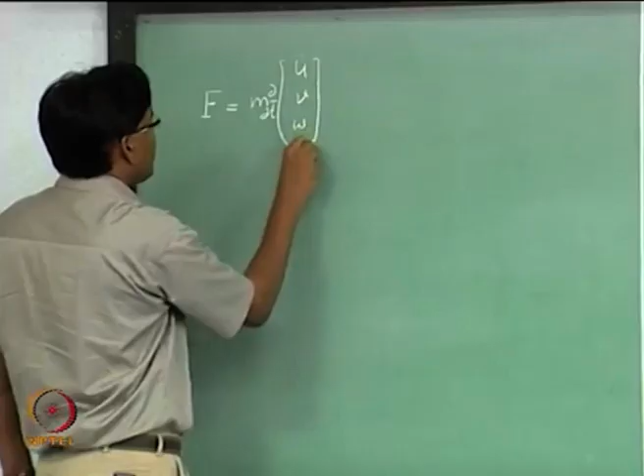Did we take into account all those things? Not really, right. So if you were to include all those things into account, then what you would have is this, plus

the mass of the aircraft changing in time. This is the mass which is internally being consumed, and there will be a mass which will be exiting the aircraft, isn't it. So you also have another component which is m-e-dot, the exit mass rate.

Remember u, v, w are velocity of aircraft along the body fixed axis. So these exit velocities are also along the body fixed axis, and m-e-dot is the rate of change of mass leaving the aircraft. This all has to be added to the Newton's law. It is going to change the momentum of the aircraft, isn't it.

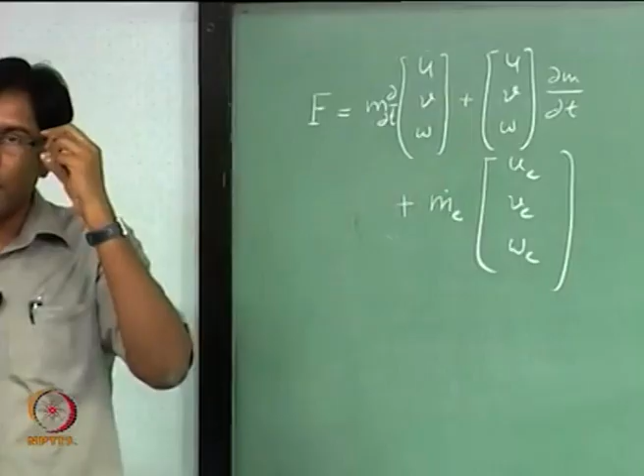But we have not modeled this part in our equations, only for the reason that all of these are actually incorporated in the thrust. Because we already take care of the pseudo forces which are being generated when the mass is exiting the aircraft through the thrust or propulsive forces, that is why we have not modeled this in our Newton's law equations. So our aircraft equations are accurate for a rigid body aircraft.

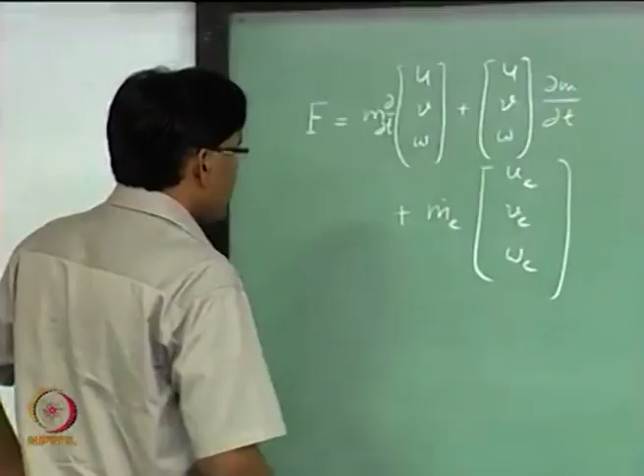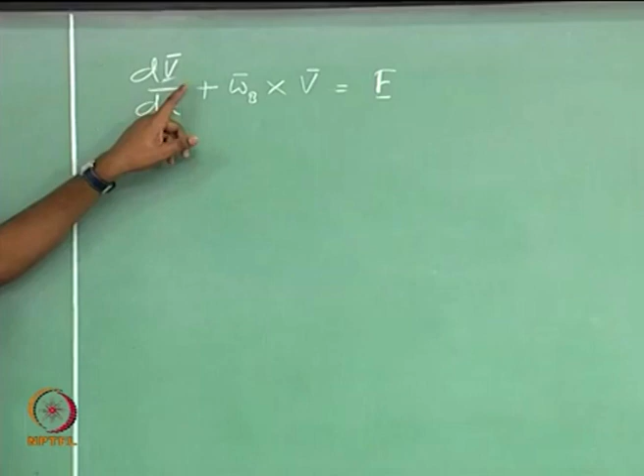This was just one question which might come to your mind, so that is why I was trying to answer this. Now, we wrote the equations in the compact form. Here V is the velocity of the aircraft along the body fixed axis. So I am writing all the equations along the body fixed axis - force and the moment equations.

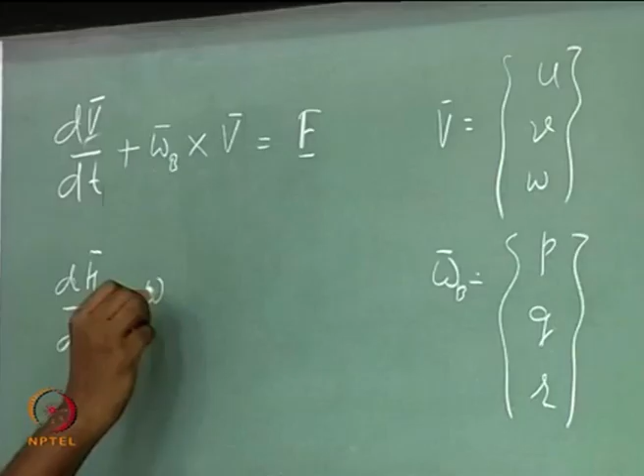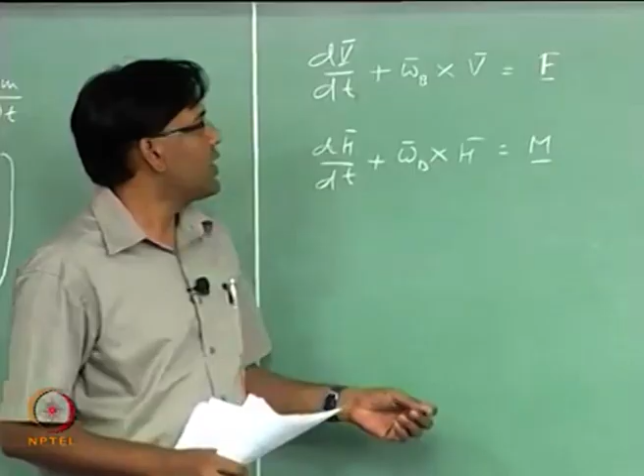What about this force? What is this force? This force is the sum of all external forces, and I have to take the component of this force when I want to separate out the equations along each axis - then I have to take the component of this force along those axes, isn't it? So let us try to write what this force is.

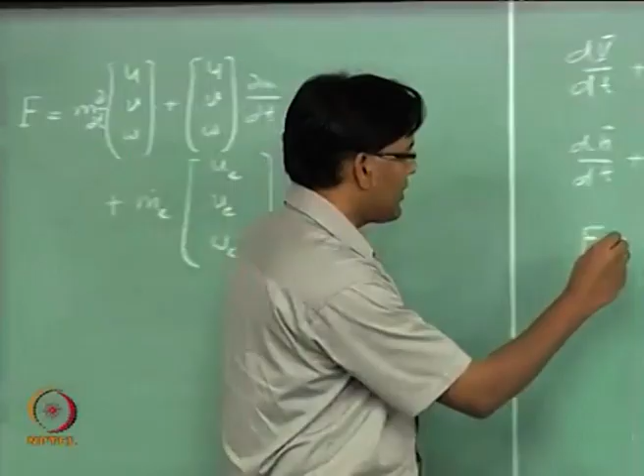So, how many forces are going to act on the aircraft? Forces acting on the aircraft - external forces - are aerodynamic, gravitational forces, and propulsive forces, right.

It will be external, but it will depend upon the variables of the aircraft. And this force will actually include also the forces that come by applying the control surfaces - when you deflect the control surfaces, that force is actually changing the aerodynamic force. So this is the aerodynamic component, gravitational component, and

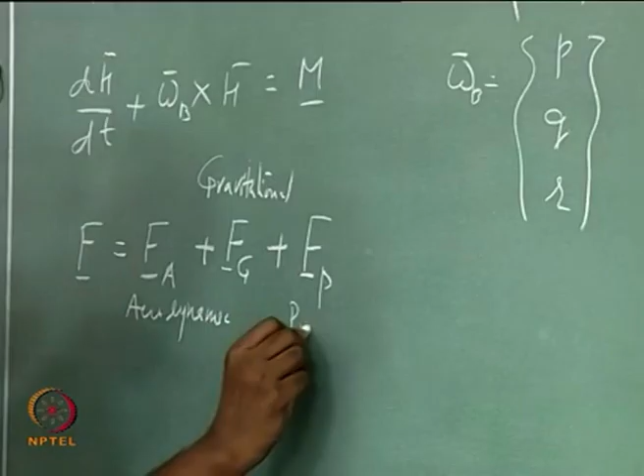propulsive forces. So, similarly, we will also have moments which will consist of these three different components.

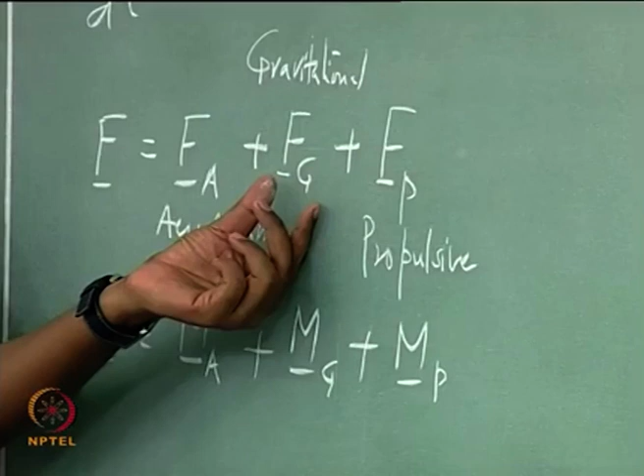Now, you know that each one of these forces is convenient to write in a different axis system. For example, if I look at this gravitational force, I know that force is acting along the Z-E axis of the earth, isn't it. So this F-g is most conveniently written in the earth fixed coordinate system, and this vector is this.

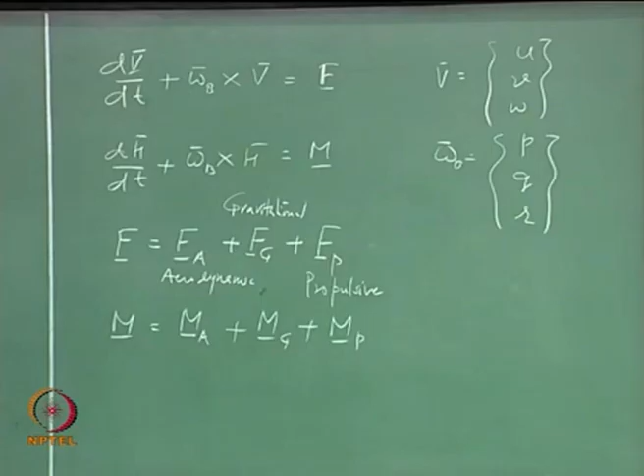F-a is more convenient to write in the wind fixed axis system. You remember we take the component of drag along the velocity, or opposite to the velocity, and lift is perpendicular to that. So this force is more convenient to write in the wind fixed axis system. We will come to this axis system soon.

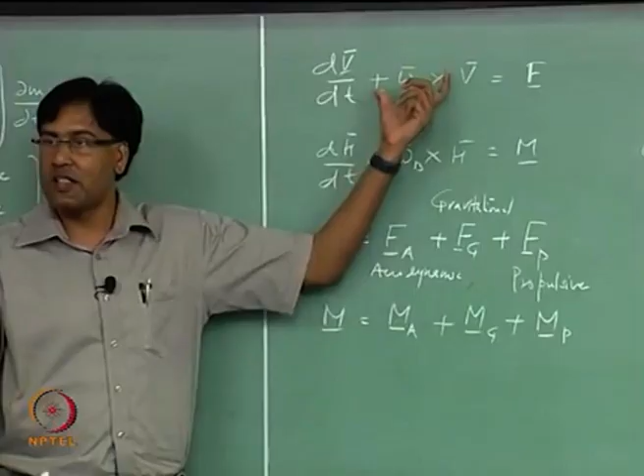Drag, the side force, and the lift - our final aim is to write the component of all these forces along the body fixed axis when I am trying to balance the two sides. It depends which axis system you want to write your equations into. You have to accordingly use the transformation matrices to write these forces and moments along that particular axis system.

Now there are different ways of looking at it. One thing is you are collecting data in the wind tunnel, trying to find out the aerodynamic forces and moments, and that you are doing in a particular axis system. So if I want to keep that data as my reference axis system, then I have to rewrite these equations along that axis system. That's one reason. Second reason is there are some axis systems in which if you write the equations, computation or analysis becomes simpler. You can do all that conveniently if you have a good knowledge of transformation matrices.

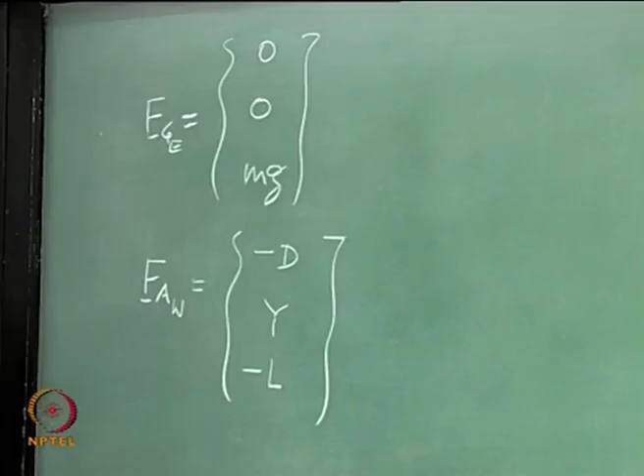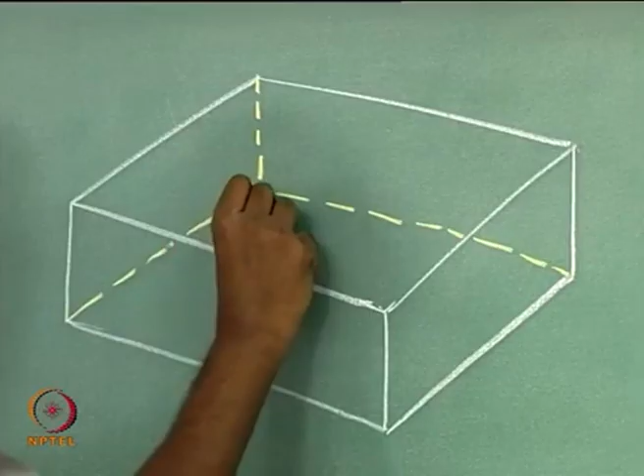I have been talking about transformation matrices in the last couple of classes. Let us try to look at how to resolve this vector along the body fixed axis. So if this is my body fixed x axis, this is body fixed z axis, and body fixed y axis.

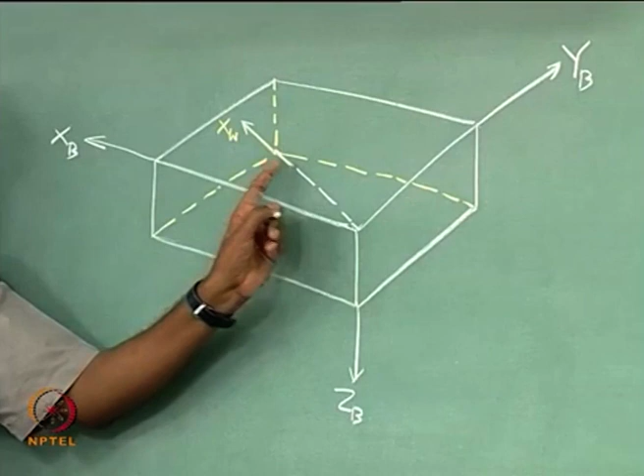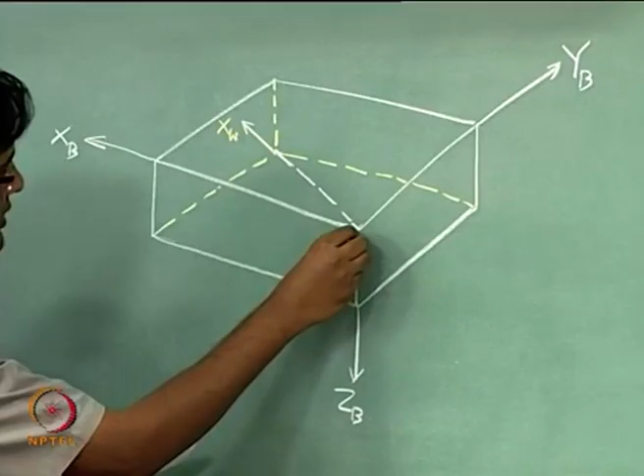The velocity vector is along this line, and that is pointing towards the x axis of the wind fixed axis system. So the resultant velocity vector is pointing towards the x axis of the wind fixed axis system. If you want to know where the other two axes of this wind fixed axis system are, they are not going to be lying on these axes.

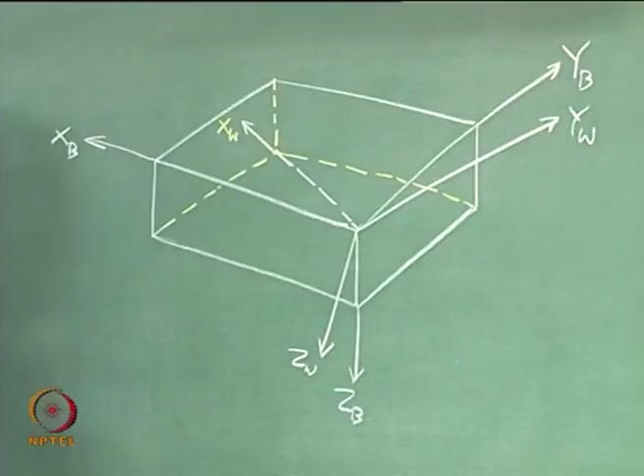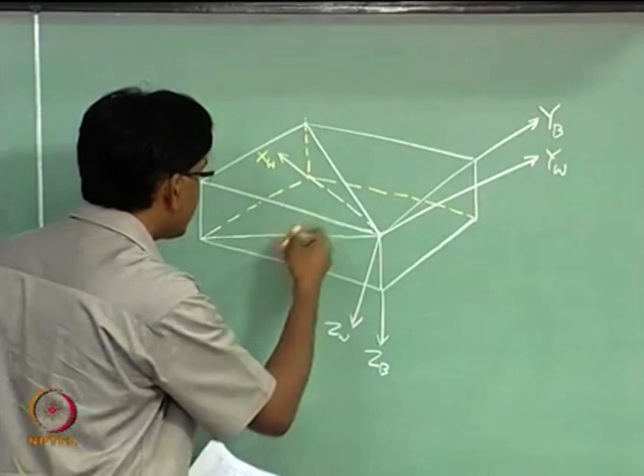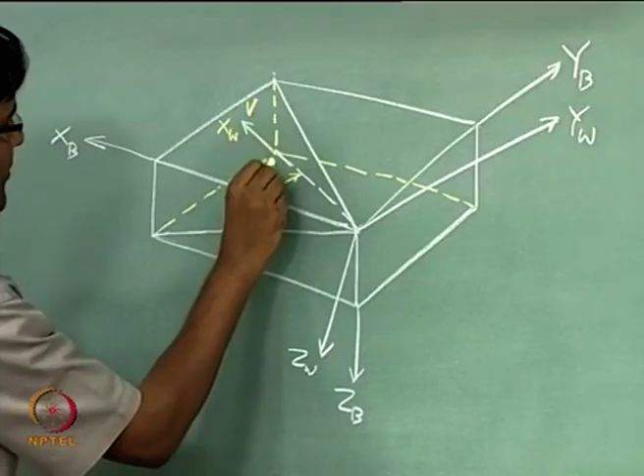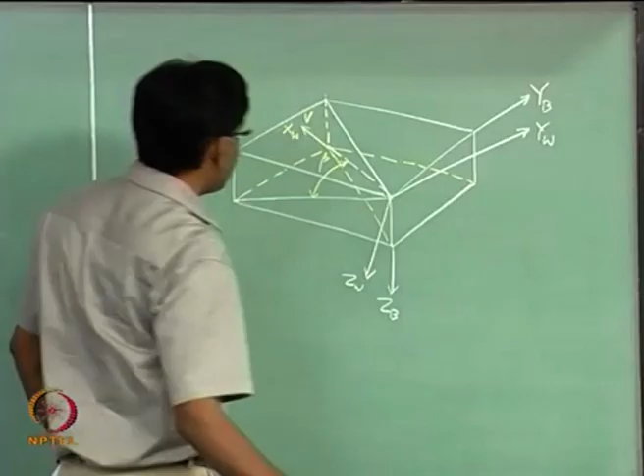So we will take a right handed coordinate system. Let us join this line and also join these two points - then you know that the angle that this vector is making with this face is your side slip angle. Everybody agrees with this? This is how we define the side slip angle to start with. So I should have actually joined these two points also, so that you get this. So beta is this angle - the angle that this velocity vector is making with this plane is the beta angle, side slip angle.

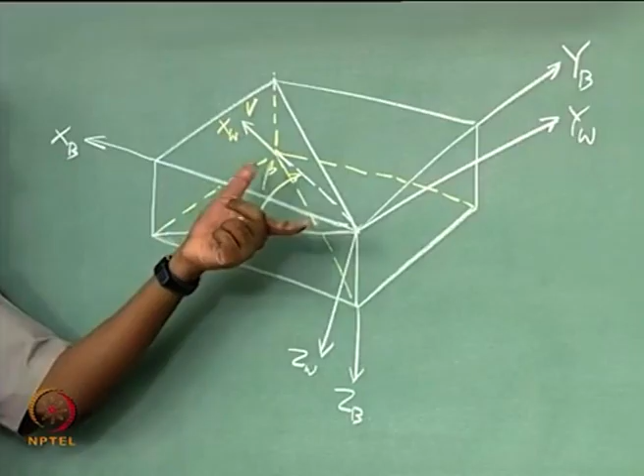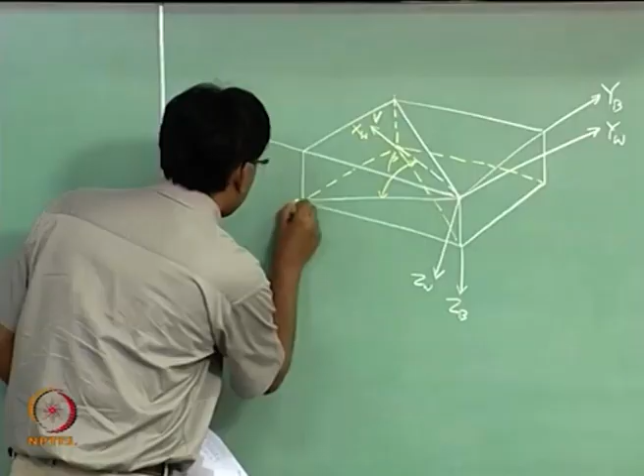Now, if I give a rotation of the wind fixed axis system about ZW by beta, then I can come to this axis system - I can get XW aligned with this line if I rotate that wind fixed axis system about the ZW axis. And what you get then is XS. So this axis system is called the stability axis system.

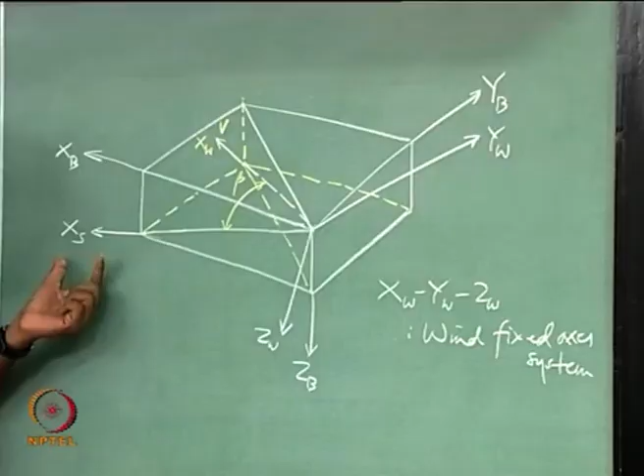Let us write down this clearly. So you have rotated this vector about the ZW axis, in the XW YW plane, giving a rotation by side slip angle beta about ZW axis, and then you reach this. So this involves rotation by beta about ZW - beta or minus beta actually, because my YW will be rotating towards XW, and we call that rotation a negative rotation. So actually it is a rotation by minus beta.

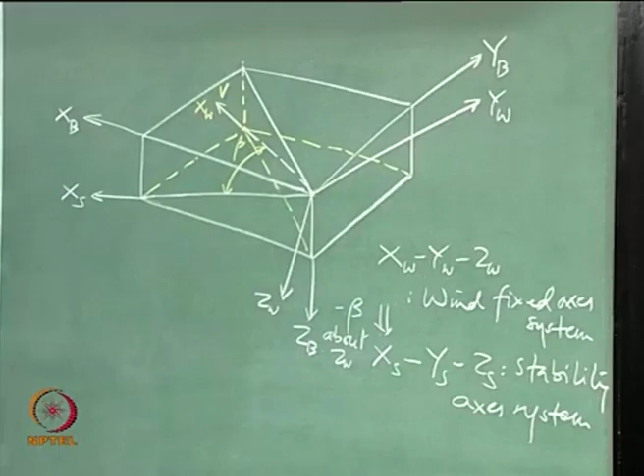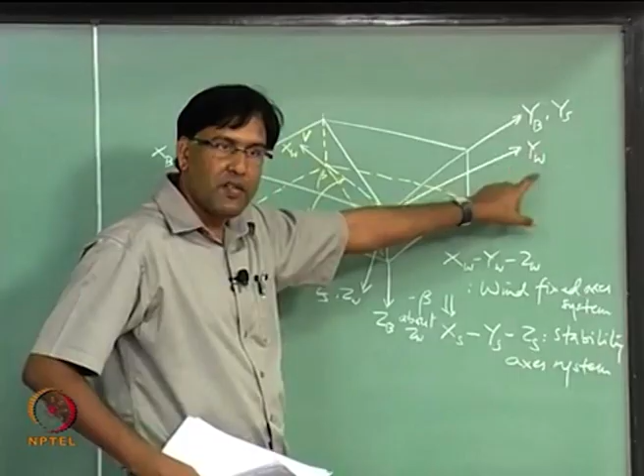So we have reached a new axis system - I have given rotation about the ZW axis. So the Z axis is the same for the stability axis system and the wind fixed axis system, and this y axis of the wind fixed axis system is going to rotate with x. So finally, after this first rotation by minus beta, it is going to coincide with the body fixed y axis.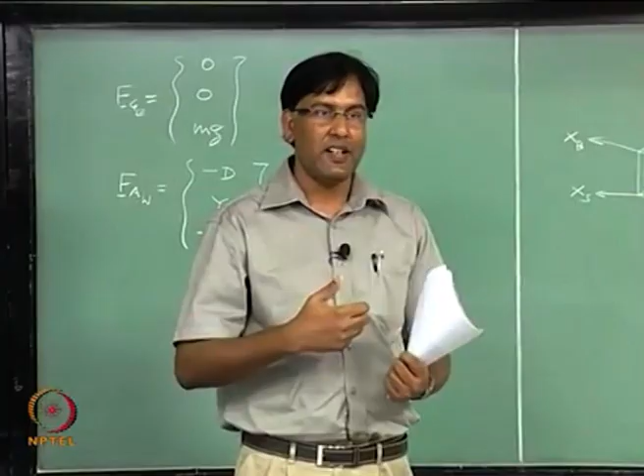What is this angle? I have taken the component of velocity, the projection of velocity on this plane. So now the velocity is in this direction. What is the angle between this axis and this axis? We are talking about the wind, the velocity vector - so what will that angle be? The angle of attack. There are only two angles involved here: the side slip angle and the angle of attack. So this angle is the angle of attack.

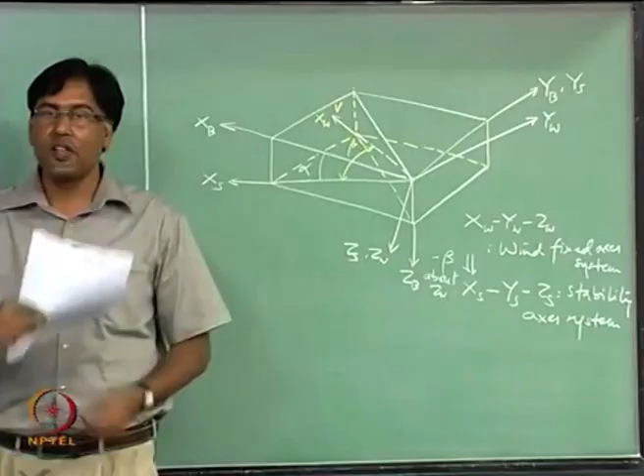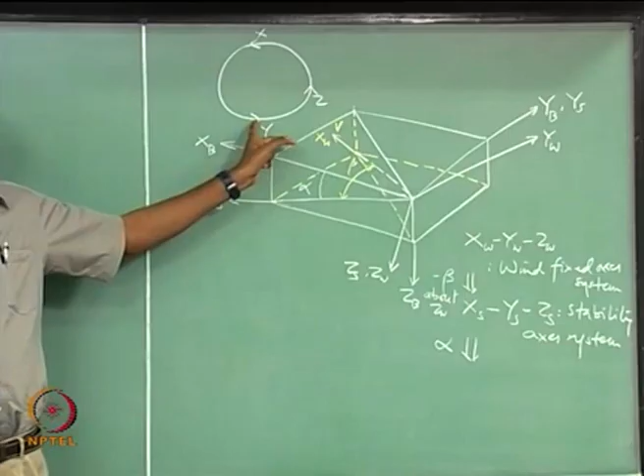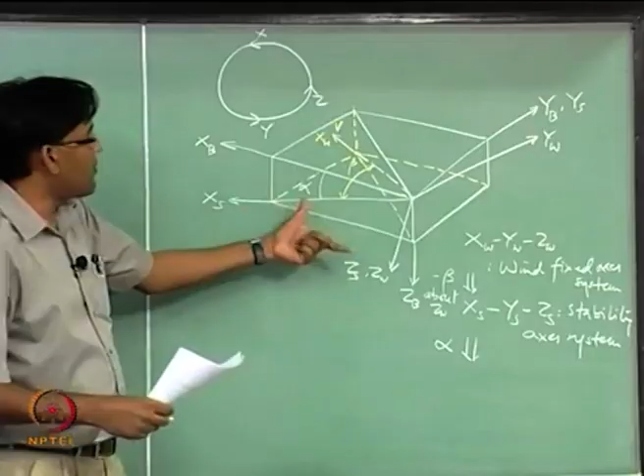Now in the second rotation, you have to rotate this XS, YS, ZS axis system about YS, so that now you are coinciding with the body fixed axis system. So the second rotation is alpha, and this alpha is going to be positive because ZS is going towards XS. Keep this in mind: if the x axis is moving towards y, then it is a positive rotation about z. So in this case, we are rotating about this new YS axis by an angle alpha - Z is moving towards X when I rotate this up, and when Z moves towards X, then you have a positive rotation.

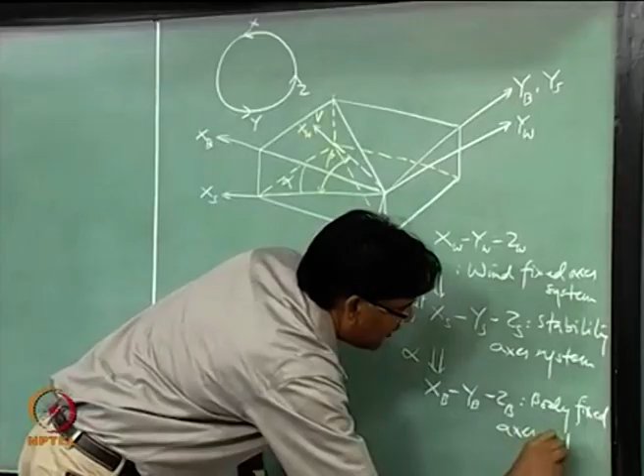Okay, now we want to find out the transformation matrices, which include alpha and beta. First rotation is minus beta, second rotation is alpha. So let us write down the transformation matrix for the first rotation.

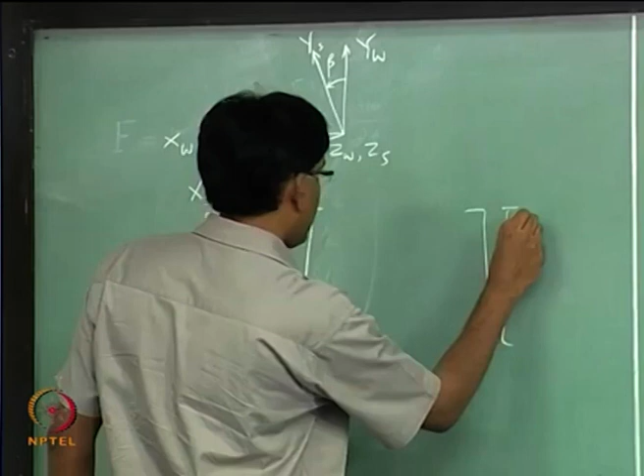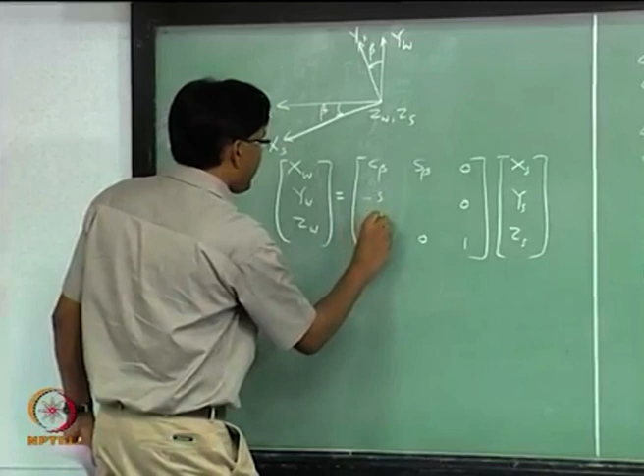cos beta. So this was the first rotation, which is actually minus beta. So I am rotating y towards x.

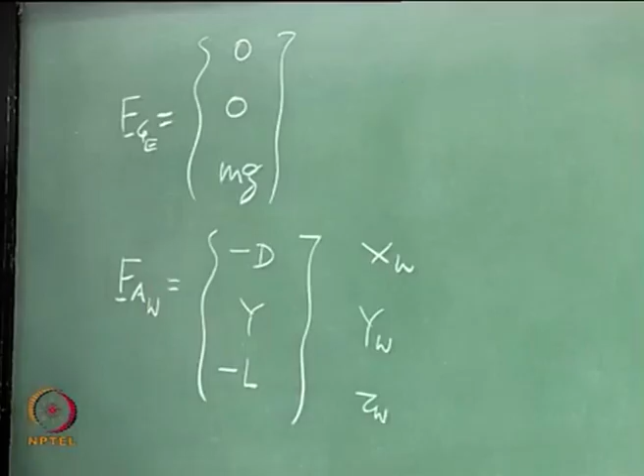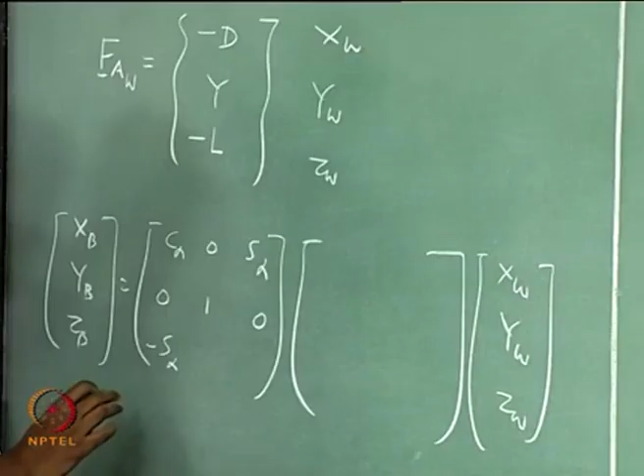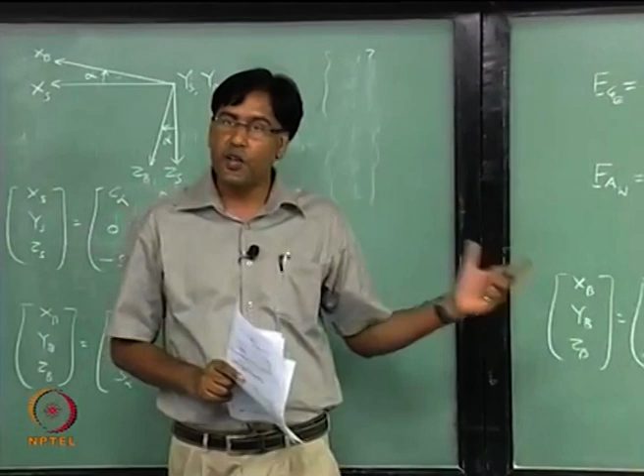The relation between the components of a single vector - we are talking about one single vector and writing the components of that vector in two different axis systems. So in this case, the relation between the component of a vector in the body fixed axis system and the components of the same vector in the wind fixed axis system is given by this relation. This is true for any vector, not only the x, y, z coordinate.

So now you have to find out, if you want to know what are the components of this aerodynamic force written in the wind fixed axis system, what are the components of that force along the body fixed axis. What you need to do is just substitute this with this vector, so that you can now write what is FA in the body fixed axis system.

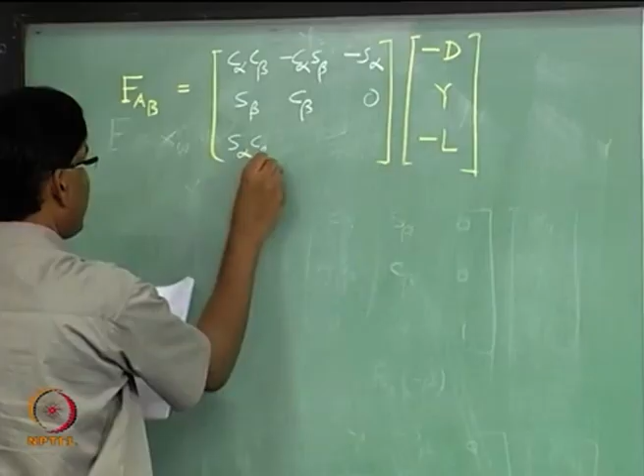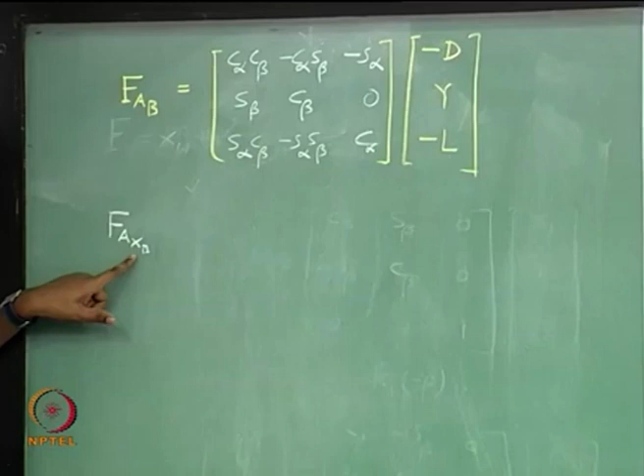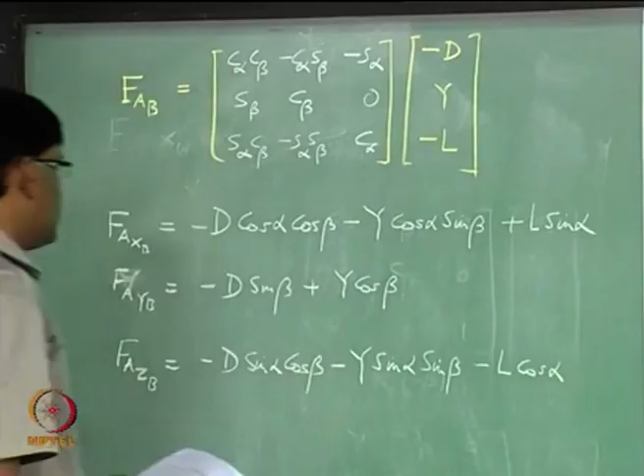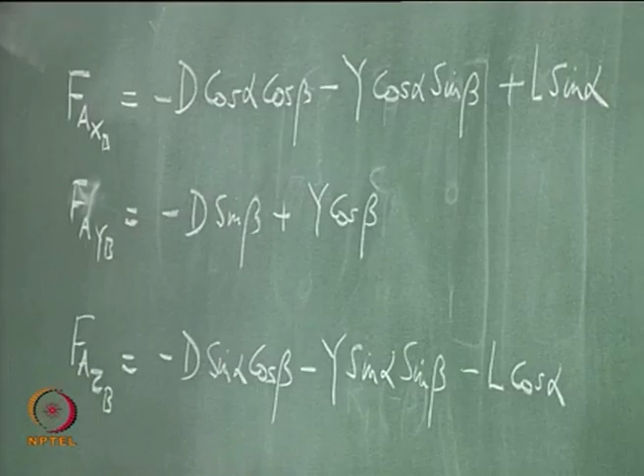Is this clear? Component of aerodynamic forces along body fixed x axis, y axis and z axis. So you have to repeat this exercise now for finding the component of this vector. Now we are writing the equations along the body fixed axis.

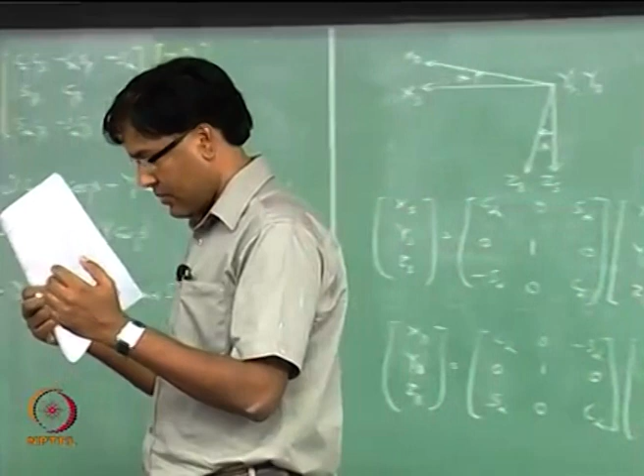So remember I already gave the transformation matrices which you can use to write down the components of any vector in the earth fixed axis system. The relation between the components of any vector along earth fixed axis system and body fixed axis system can be written using the three rotation matrices that we talked about yesterday - psi, theta and phi rotation matrices. We can use that and write the component of this vector now along body fixed axis.

So I have Fg written as this. Now I want to find out what is Fg in the body fixed axis system.

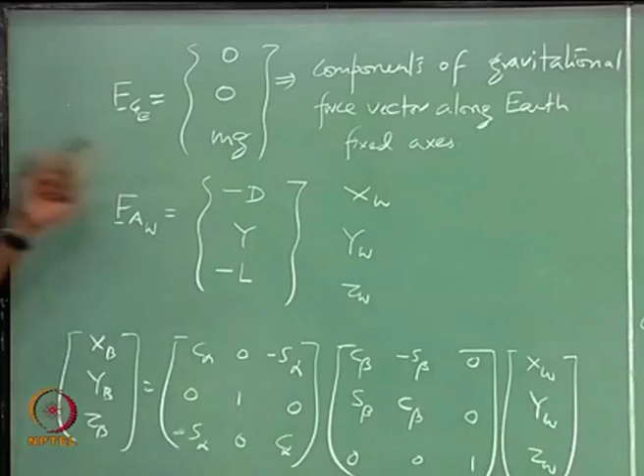Clearly here you see that if you are talking about defining your earth fixed axis system on the surface of earth somewhere, then the z axis will be pointing towards the center of earth, and x axis is pointing towards the north pole, and y has to be completing the axis system, normal to x and z.

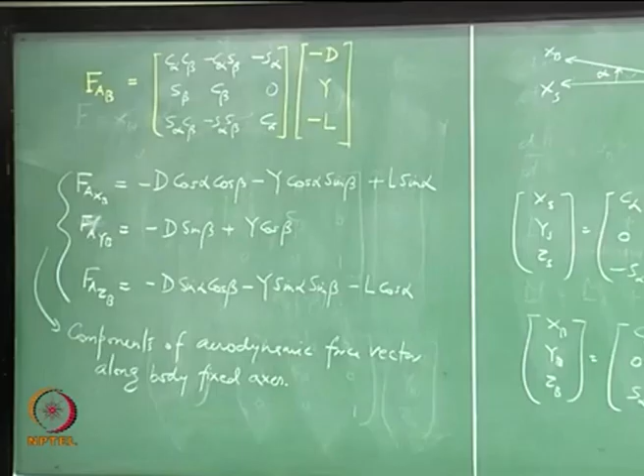We know that D is drag, Y is side force, L is lift. So you know how to resolve any vector now along different axis system.

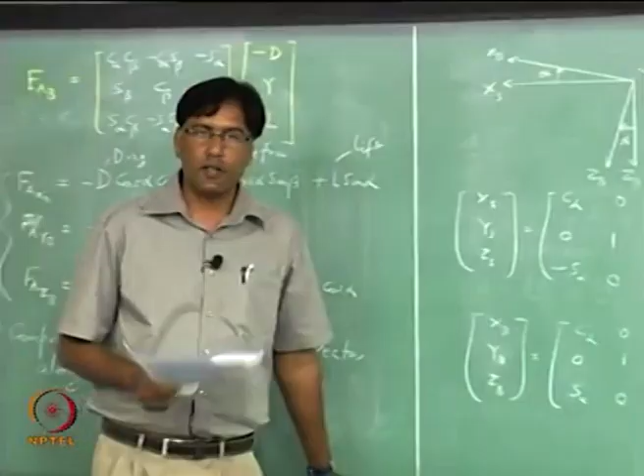Thrust is - we are going to assume thrust to be along body fixed x axis. So we will take it like that, and I am assuming that Fp, which is the propulsive force, is along body fixed axis. So this thrust is along the body fixed x axis, other two components are 0.